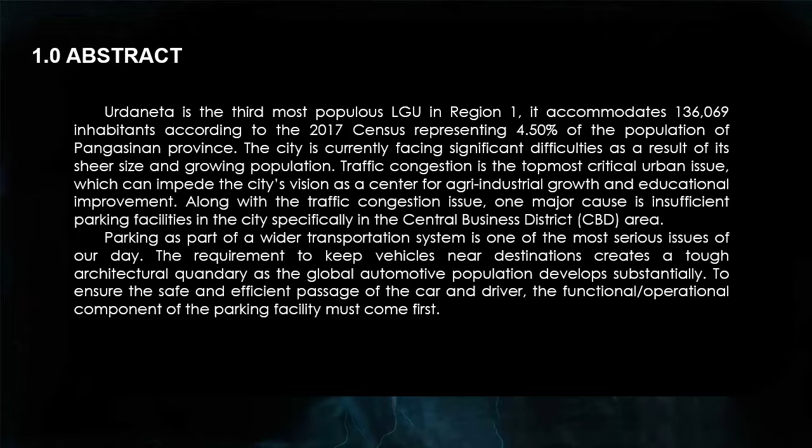Through the actual observation of the CBD's existing on-street parking and paid parking in the mall area, it is evident that existing parking facilities are not enough to cater to the need for parking. Moreover, from the direct interview with the chief of the POSO, CPDO, and city engineering, they are all in chorus that there is a need for parking facility. But unfortunately and regrettably, there are no data available for the volume of cars and statistics for the claim. Therefore, with this study, the proposal of one-stop parking facilities is being raised.

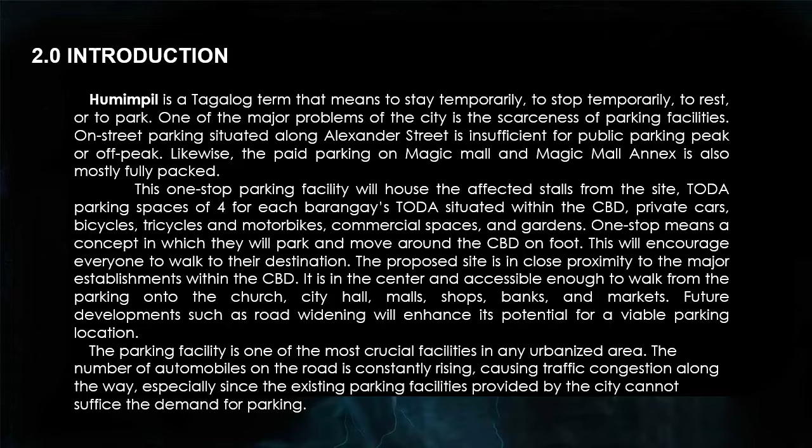The parking facility is one of the most crucial facilities in an urbanized area. The number of automobiles on the road is constantly rising, causing traffic congestion along the way, especially since the existing parking facilities provided by the city cannot suffice the demand for parking.

Statement of the problem. The fast urbanization of the city continues together with infrastructure development. Hence, the problem of parking arises. The city provided on-street parking within the central business district, with a total of 65 parking slots. The Public Order and Safety Office, POSO, said that the parking provided is not enough to suffice the need for parking in the CBD area.

It is always fully packed the whole day and the whole week. CBD is the location of the most dominant establishments, the likes of City Hall, Cathedral, Elementary School, shopping malls, banks, shops, and major markets. With these establishments within the CBD, an increasing number of transport vehicles are also expected. Thus, the parking facility needs to be addressed.

Urban parking challenges. There have been initiatives to regulate and reorganize traffic congestions in the CBD, including the construction of bypass road and traffic flow or routing. It also includes the provision of on-street parking along Alexander Street.

Alexander Street on-street parking. The two parallel areas of the two arteries are developed for commercial facilities such as Banco de Oro, BPI, Metrobank, Mercury Drug, Hardware, Magic Mall and Annex, Urdaneta City Central School, Old City Hall, and Urdaneta Cultural Center, along with other commercial establishments. With these establishments along this area, existing parking is not enough.

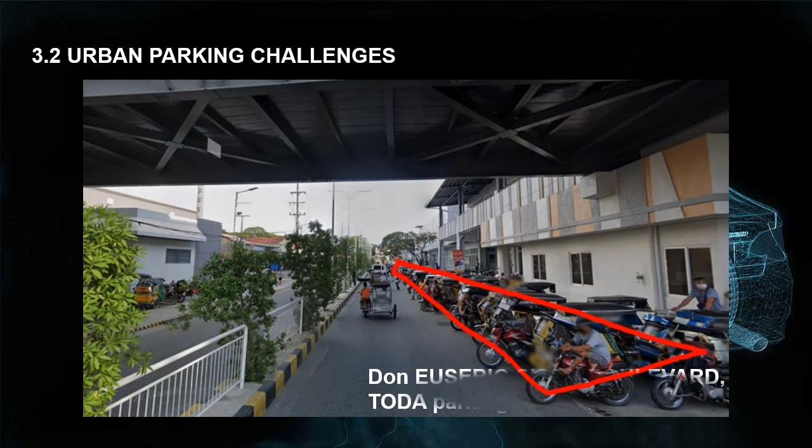Don Eusebio Sison Boulevard is located between two shopping malls of Magic Group of Companies. The existing land use in the area is typical commercial, with a grade separation structure with two arteries. This street is one way on both sides, and there are a total of 21 barangay TODAs in this street.

Sison Street, located along Sison Street, is bounded by commercial stalls and the location of the Roman Catholic Church. The existing land use in the area is commercial. This area, with the tricycle private and TODA, causes the street to be unable to operate at its maximum capacity.

The local government has made it policy to supply on-street parking. Unfortunately, it is not sufficient to suffice the demand for parking for private commuters, shoppers, and deliveries around the CBD of the city. This shows a view of the area where on-street parking is allowed.

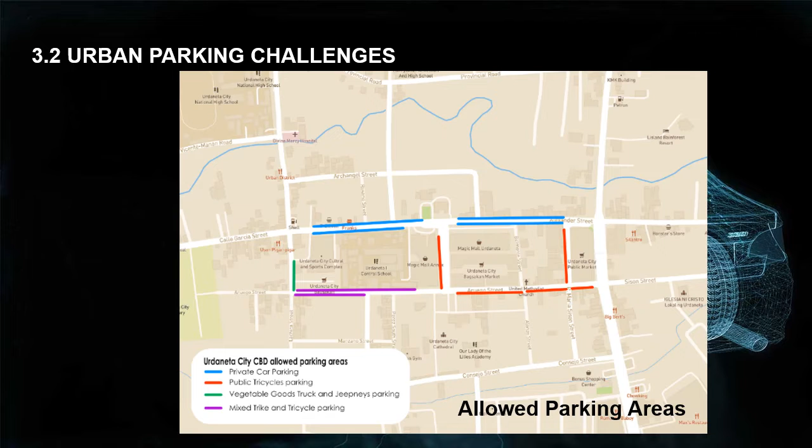With the aim of the city to boost its tourism sector, there are ongoing infrastructures within the CBD. These projects will eventually increase the need for parking in the CBD.

City Tower: this 15-story tower is a remarkable milestone for the city. It will be the first tower in the region. The tower has a viewing hall on the 7th floor, a suite room on the 11th floor, and a multi-purpose hall on the 12th and 15th floor. It is situated within the CBD with a vision of overlooking the entire cityscape. The income-generating tower will be free and privileged for the Urdanetanians, and an entrance fee will be collected from outsiders.

Urdaneta City People's Park is an ongoing project of the city to give a place for recreation for the people. It is located beside the Urdaneta Cultural Center. The park will serve as the main open space of the city. It will feature a state-of-the-art dancing fountain, playground, benches, open lawns, landscapes, and hardscapes.

Objective of the study: the city's urban development should also develop its facilities. In this study, the following will be tackled: assessing the need for a parking facility in the central city due to the insufficiency of the existing on-street parking; evaluating the viability of the proposed site of the parking facility and relocating the affected tenants of the existing old market to the proposed facility; and identifying the solution to the emerging demand for parking in the central city and integrating commercial spaces.

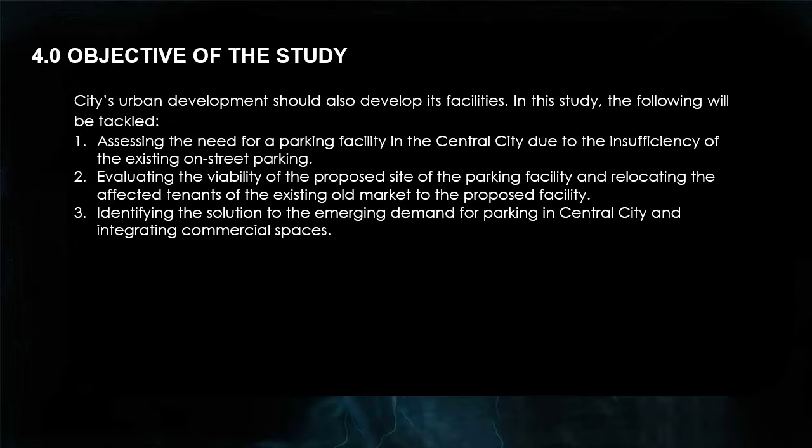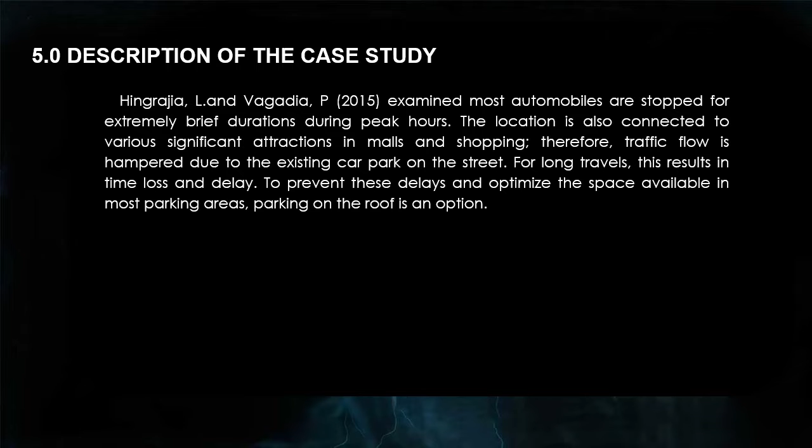Description of the case study. Hingrajia L. and Vagadia P., 2015, examined that most automobiles are stopped for extremely brief durations during peak hours. The location is also connected to various significant attractions in malls and shopping. Therefore, traffic flow is hampered due to the existing car parking on the street. For long travels, this results in time loss and delay. To prevent these delays and optimize the space available in the most parking areas, parking on the roof is an option.

A case study of Amul Dairy Road: the author has studied the quantity of parking and parking loss, and the study rewards the city's commercial core. Two types of surveys were done to count the volume utilized for enrollment recording techniques: survey video recording, a survey of land usage, and a parking survey. He evaluated the data and proposed that the Amul Dairy Road use mixed territory. The right-of-way is 30 meters long. Traffic composition has a higher fraction of two-wheels than others. According to the data research, car parks are the most popular in the short term and the least popular in the long term.

A Bhopal study with reference to user satisfaction with parking space and accessibility of the market concluded that during weekends public demand for vehicle parking exceeds supply, having a negative impact on retail sales and causing severe dissatisfaction while shopping. This article investigates the many features of extent variables that impact client pleasure when purchasing.

The study was descriptive in nature, with a self-designed questionnaire employed to collect primary perceptions. In the roadside questionnaire, retailers and customers were asked their thoughts on the market area, switches that may be readily done in the present policy, maximum parking, and remote parking. This research is an attempt to examine topics connected to the aforementioned criteria.

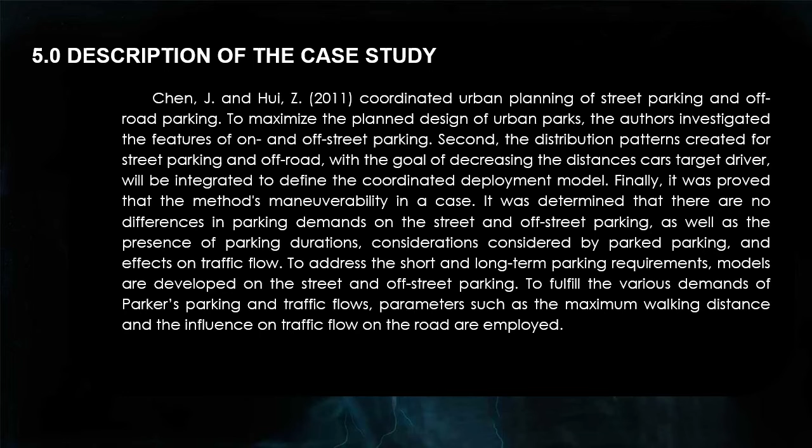It was determined that there are no differences in parking demands on street and off-street parking, as well as the presence of parking durations, considerations by parking, and effects on traffic flow. To address short and long-term parking requirements, models are developed for street and off-street parking to fulfill the various demands of parkers, parking, and traffic flows. Parameters such as maximum walking distance and influence on traffic flow and the road are employed.

Significance of the study: this study will benefit car owners and drivers, commuters and riding public, the local government, and the environment. Drivers and car owners: to provide parking facilities for automobiles and retain on-street parking.

The structure of parking spaces and roads could be used to the fullest potential by cars. Commuting public and tricycle drivers: the reduced congestion will make it easier for drivers and passengers of moving vehicles to navigate the streets and get where they're going. Tricycle and TODA terminals will be in one place and sheltered.

Stall owners and commercial establishments will have a better and more efficient structure for their business, with no need to worry about leaking roofs and unorganized stalls. Also, commercial establishments within the downtown CBD will benefit from this study. With its close proximity and walkability, commercial establishments having no parking spaces will be reachable.

City government: the city will have a base for further study for the same project, and additional revenue should this study be pursued. Environment: less traffic congestion and no cars roaming around to find parking mean a lesser carbon footprint. And since it is close in proximity to the major establishments in the CBD, walking will be encouraged. Though bike lanes are not available in the city, there is a provision for bike parking.

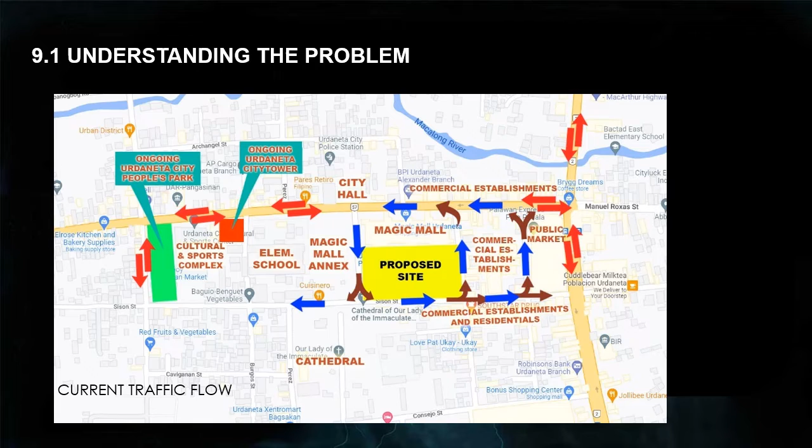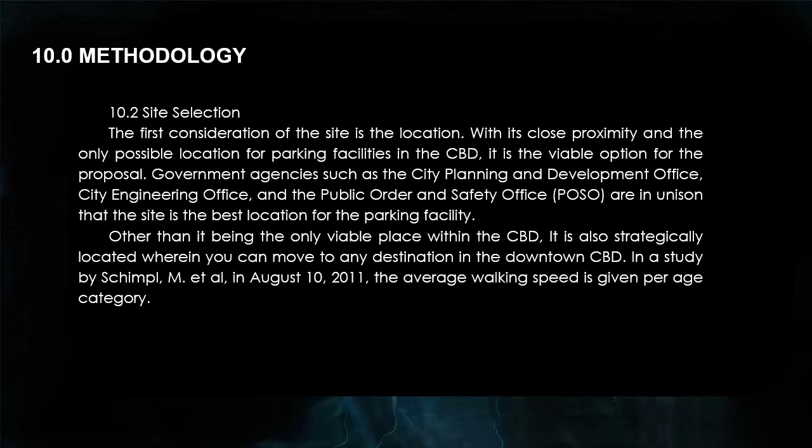The study by Schimpl, M. et al., August 10, 2011, gives the average walking speed per age category.

Distances of the establishments and facilities from the site: People's Park at 490 meters, City Tower at 420 meters, City Hall at 170 meters, 85 meters to the Cathedral, and 395 meters to the Public Market.

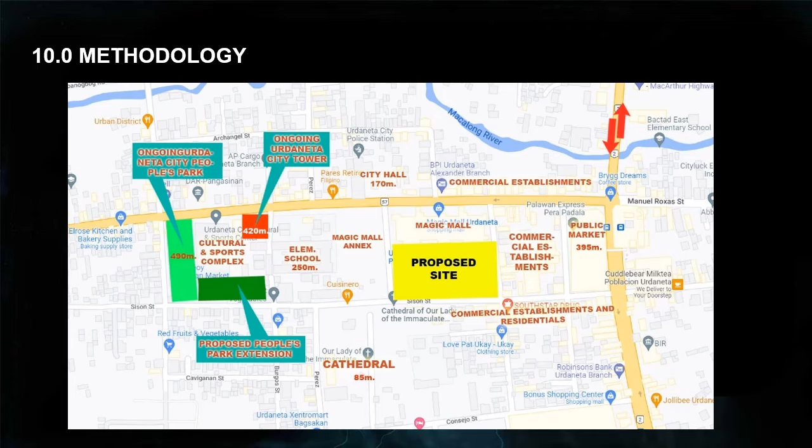Results and discussions. Most of the establishments along the downtown CBD are all commercial and with few to very limited parking spaces. Finding space for parking leads to traffic congestion in the downtown CBD.

One-way traffic flow somehow eases the congestion but does not remedy the problem. People who travel to the market, job, church, and other places of business primarily use passenger automobiles.

The most on-street parking spots are on Alexander Street. Within this region are facilities like the public market, school, city hall, and shopping centers.

In this figure, car parking and TODA entries and exits are totally separate to avoid collisions and congestion in the traffic flow. The future road widening will help decongest the traffic in this area as it will create an avenue that caters only to the cars that will use the parking, and those who will pass on Sison Street.

To encourage bike use, bike parking is provided on the island in front of the parking building.

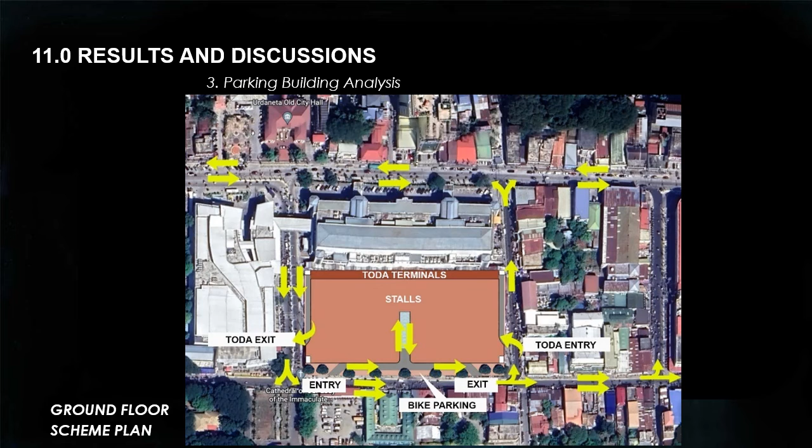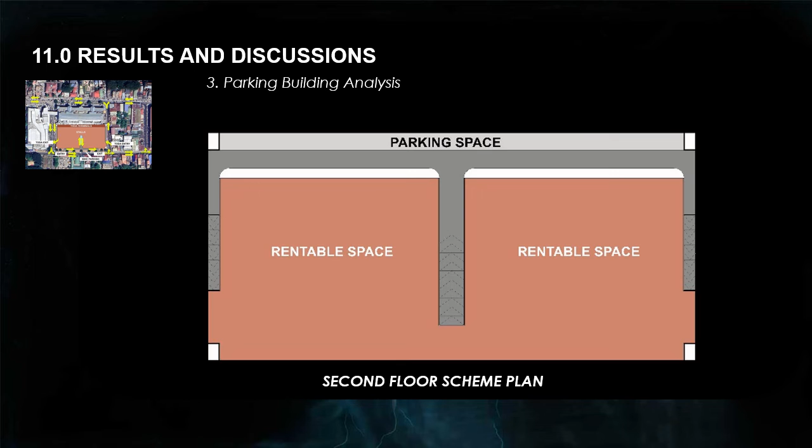As shown in this figure, rentable spaces for commercial offices, shops, etc. are also provided, with parking exclusive for tenants as complementary for renting.

The third floor consists mainly of parking spaces, as shown in this figure. To allow natural ventilation, the walls will be open through and through. This will lessen the carbon footprint.

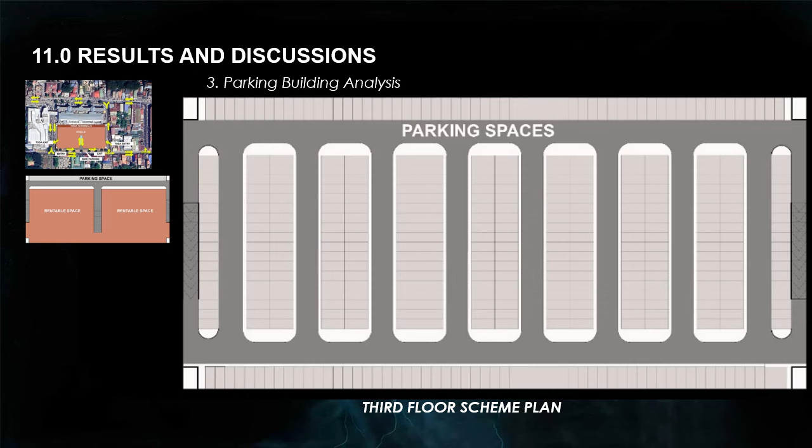This upper floor parking has an opening to the roof to create more ventilation and air circulation.

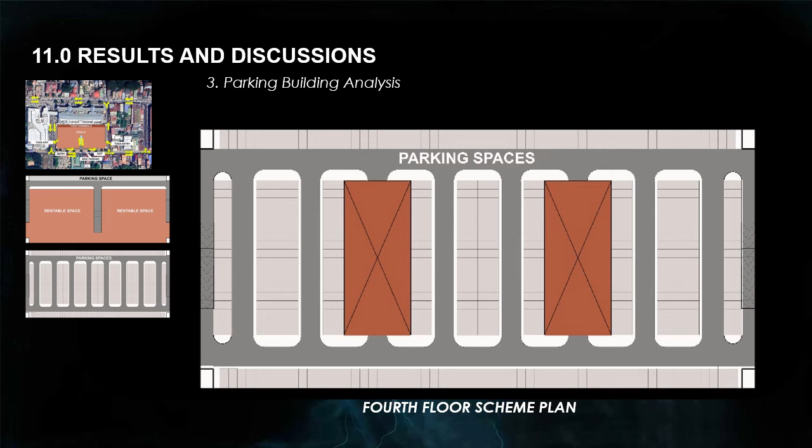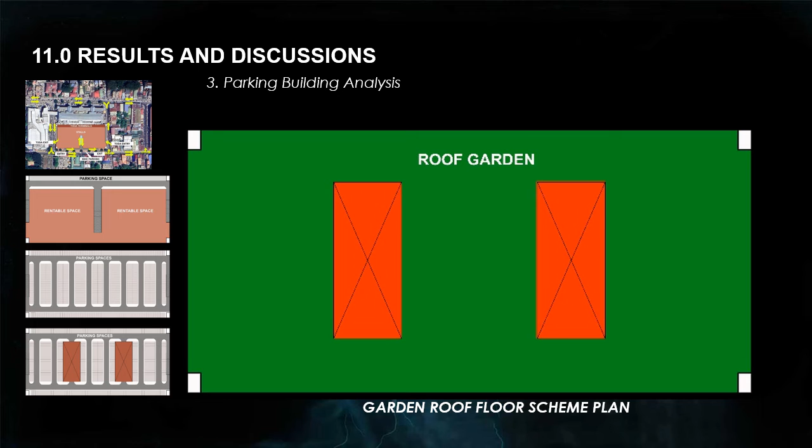Conclusion and recommendation. Although the main objective of this study has been met, it has been assessed that, using direct interviews, observation, and data analysis, there is indeed a need for a parking facility in Central City due to the insufficiency of existing on-street parking.

The viability of this site has been evaluated to be the location of the proposal. It is a strategic location and within walking distance of all the major establishments within the CBD.

It is identified that a one-stop parking facility will suffice the problem of supply to the higher demand for parking facility. The researcher strongly recommends further research and study on this topic to bring it to its fullest potential.